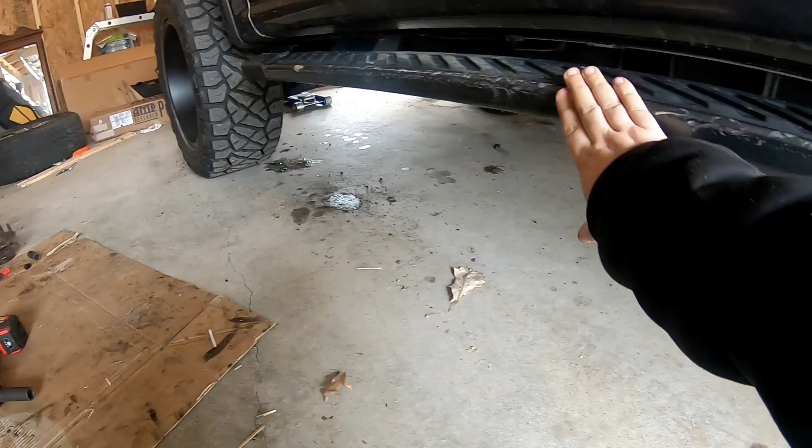Alright, so back in the garage. Here are the stock running boards that are on there. This is the one that got damaged, and I'm going to be replacing it anyway. So...

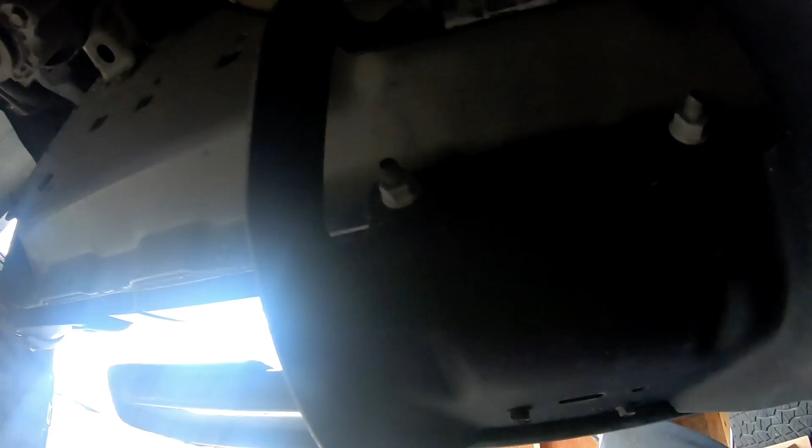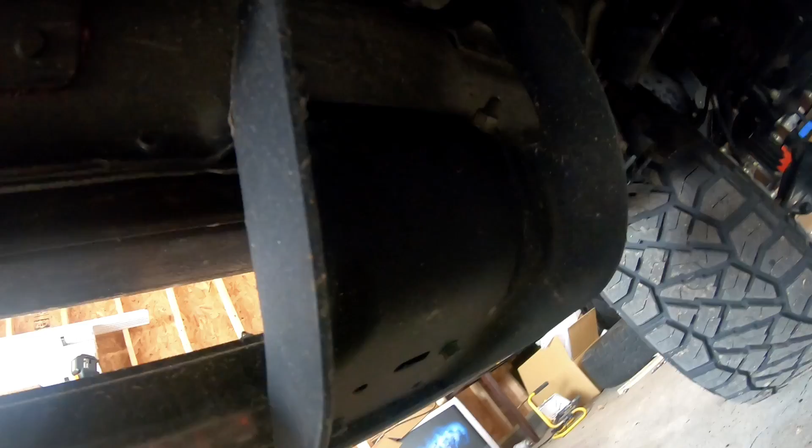Climb under. It looks like it is just 3 bolts in the rear, and then same thing in the front. I assume the same on the other side. So go ahead and take those off.

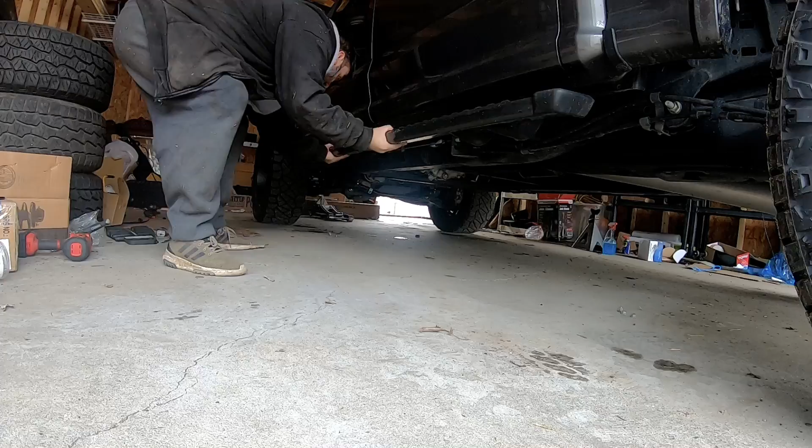Alright, so got all the bolts off. It looks like it should just lift off those posts and come right off, which it is. So simple enough to take off.

Alright, so we got those off. Those are pretty easy, just 6 bolts on each one, 3 at each hinge there, or mount. Take those off. Came off.

Love the way the truck looks without them. However, functionality wise, the family would kill me. So got it off this side. I think it looks awesome. But let's take a look and see what's in the box here for the amp power steps. Let's break into this box and see what we got.

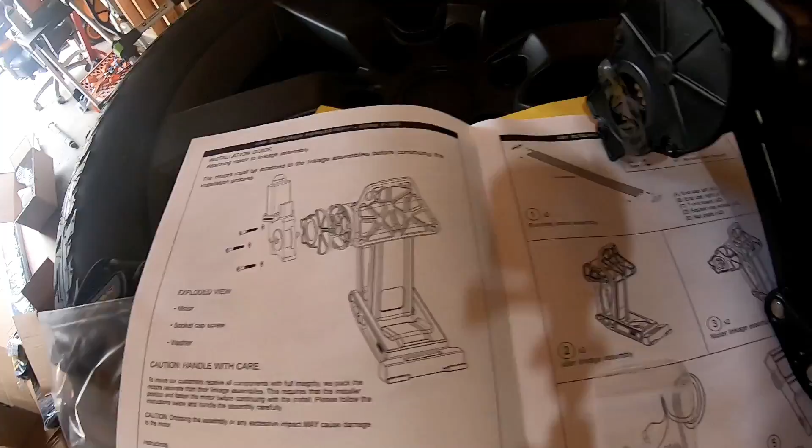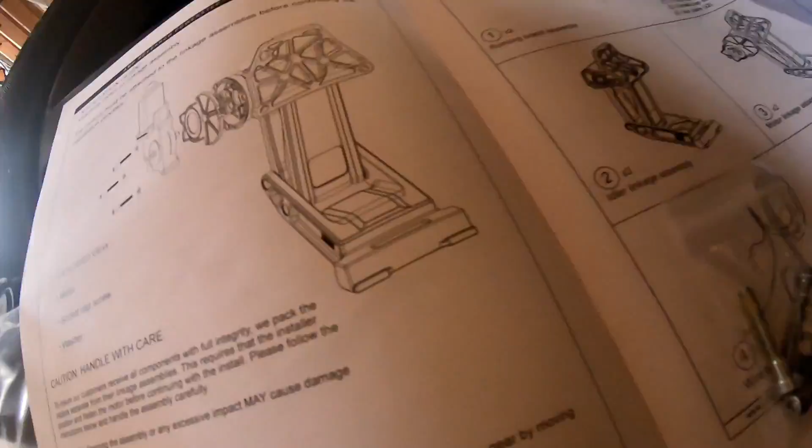Alright, so if we're looking at the instructions, make sure the amp is open. You have this cover over top, the gear, and then the motor is going to fit on like so with those bolts. So let's just go ahead and get that set up. So don't need this tape on there.

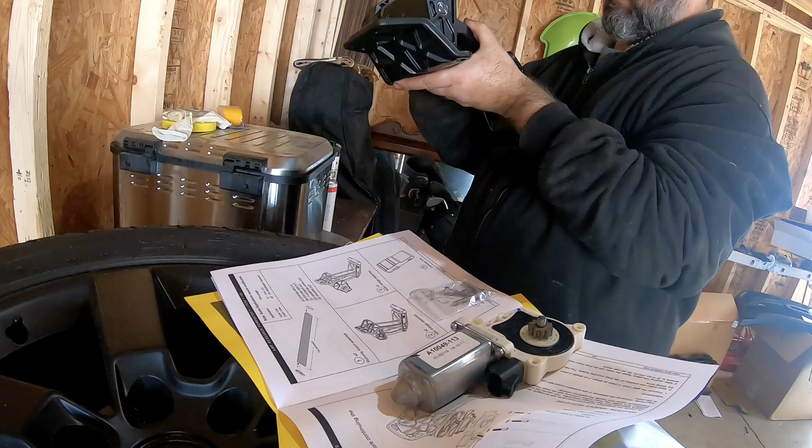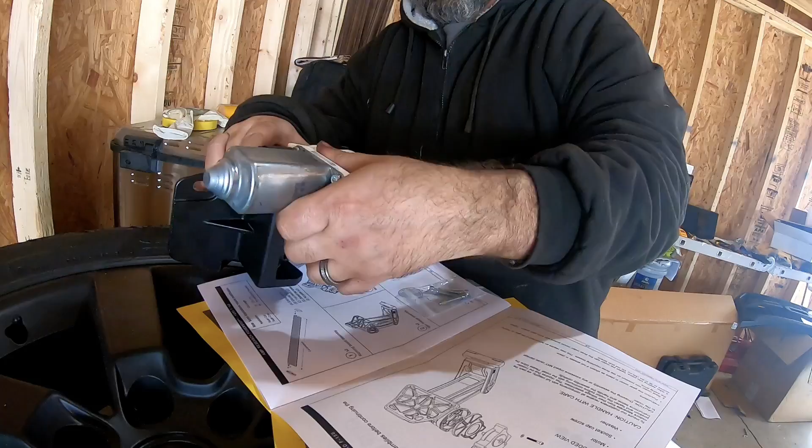So step is open. Get that lined up. There we go.

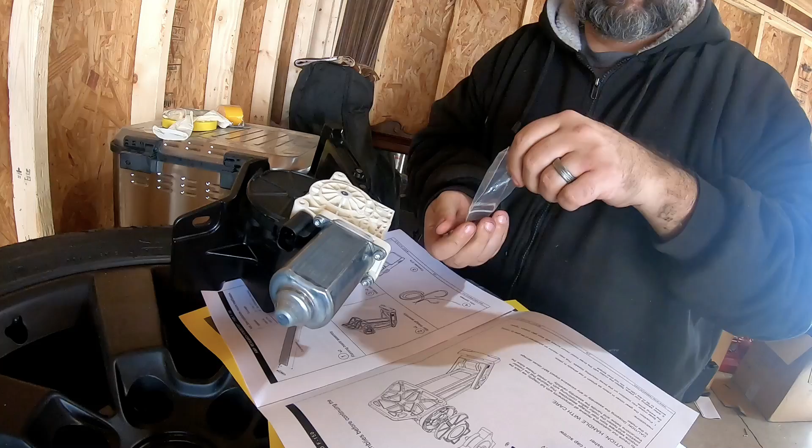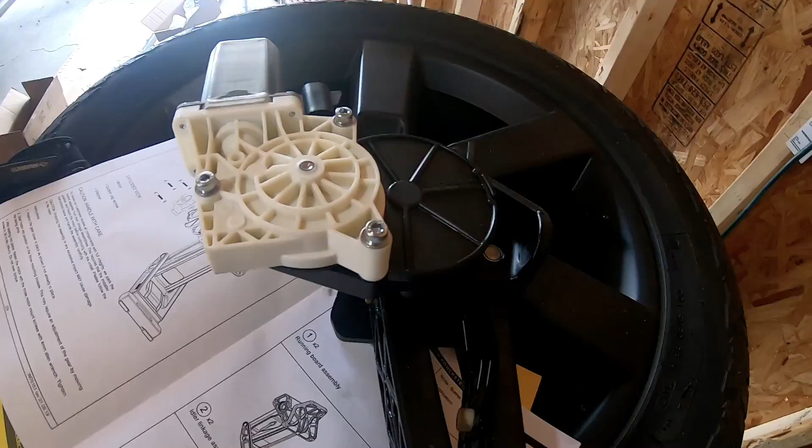All right, so these are going to have to get torqued to 36 inch-pounds. I'll find my torque wrench and an Allen wrench to do that.

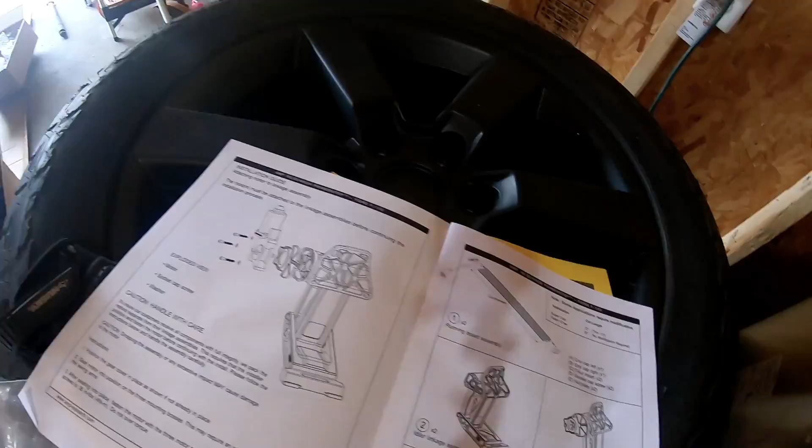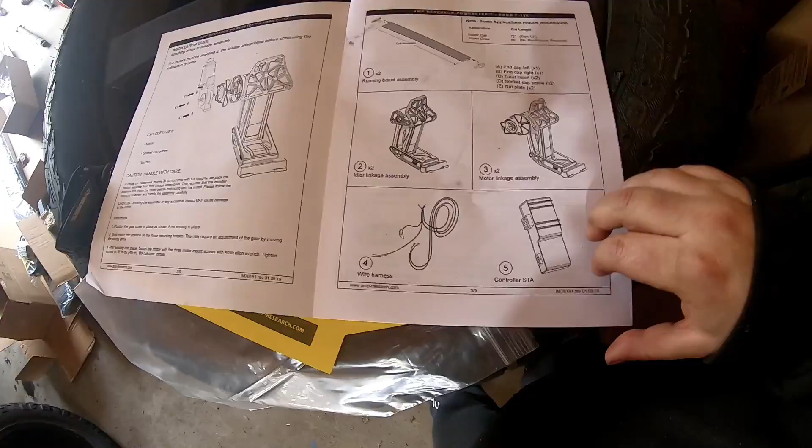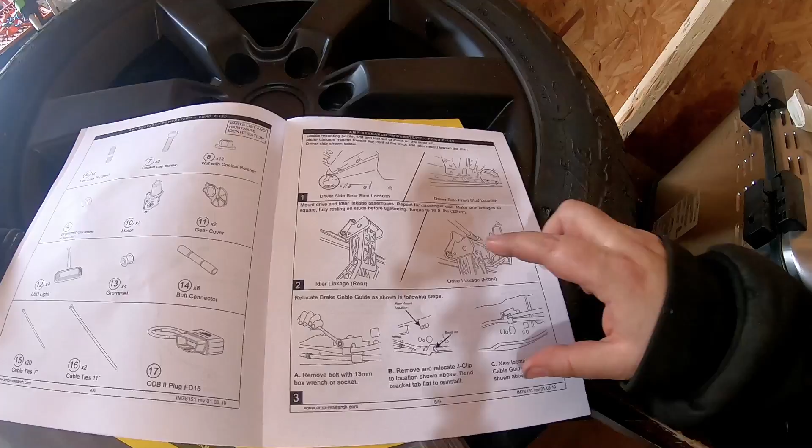Then let's make sure we got everything. Got the 2 boards correct. Got the assembly with the motors, wiring harness, controller, gear, LED lights, OBD2 plug. Going to install the mounts, the one with no motor in the back, one with the motor in the front, and we'll see what we need to do.

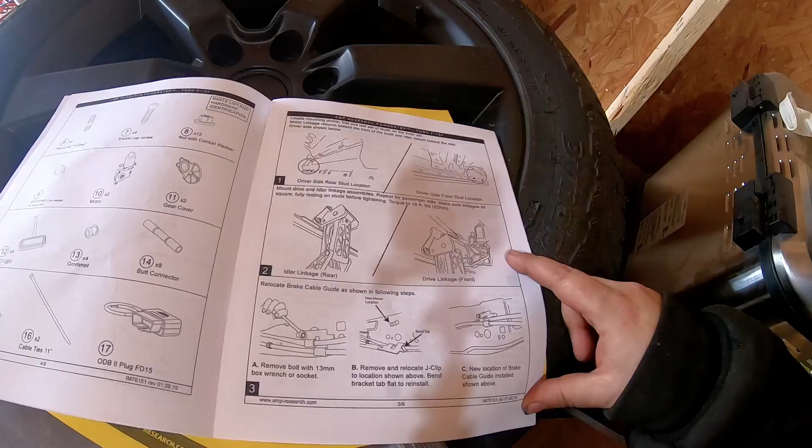Alright, so here's 3 of the old studs. They're already on there. Need to put this on.

This one's a little bit harder to get to. That's going to need an open-end wrench to tighten up, because I'm not going to get a socket on there. These other ones can still get a socket on.

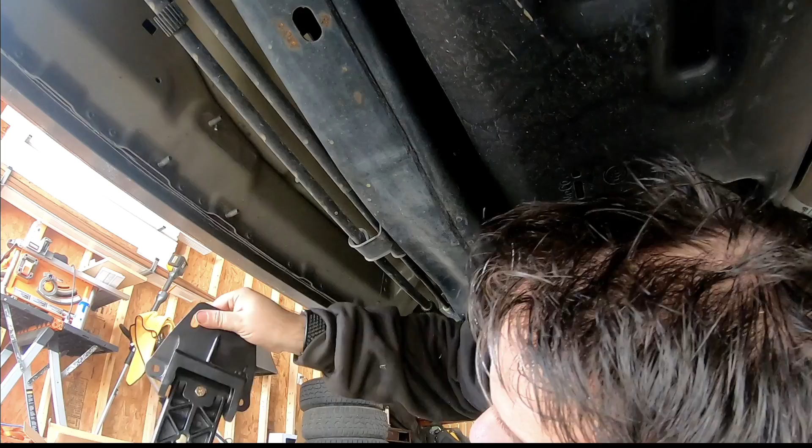Alright, so those are snug. Go do the back ones. Then it's just the same thing in the back, just without the motor. Put it onto the studs.

Alright, got those snugged up. That's where the steps will set. I have to say, this is like the perfect height, this 4-inch lift. I could just roll around underneath the truck without any problems and reach everything, so I'm really enjoying the lift.

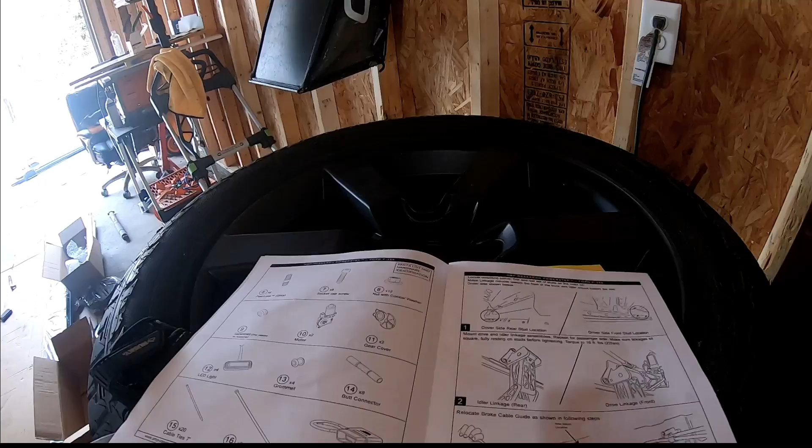But yeah, so these are installed, just snugged up. I'm going to go install the other two on the other side, get those snugged, and then I'll go through and torque everything. I think it said, what was it in the manual? Yeah, 16 foot-pounds, so not too heavy. So cool. I'll get the other ones installed on the other side, get everything snugged up, then go through real quick and torque everything, and we'll go from there.

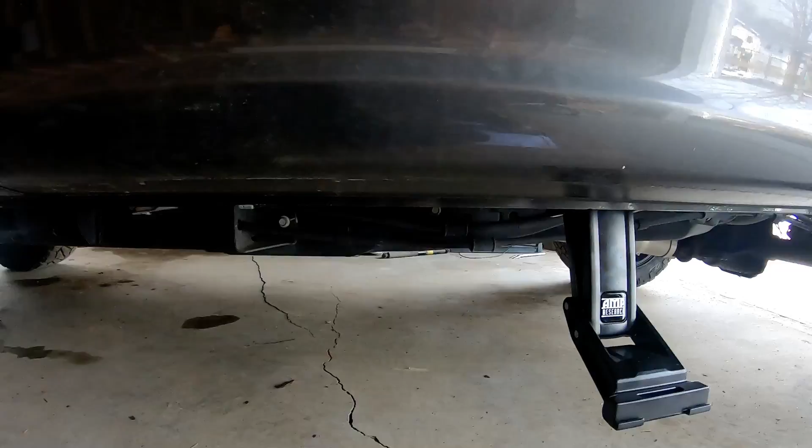Alright, so here on the driver's side, right by the back mount, there is your brake line guide. I need to remove this bracket and move it up here. Take that out. Now there's this tab here, which you're going to have to bend out flat. So you move that up. There's no hole for it to go in, so that's got to get bent flat.

So now I just got to take this clip. Oh shit. Alright, well, supposed to remove that clip and then push it up there.

Now let me go try to find a magnet so I can pull that clip out of there. Alright, didn't find a magnet, but I was able to fish it out. So now I'm going to actually move that up to there.

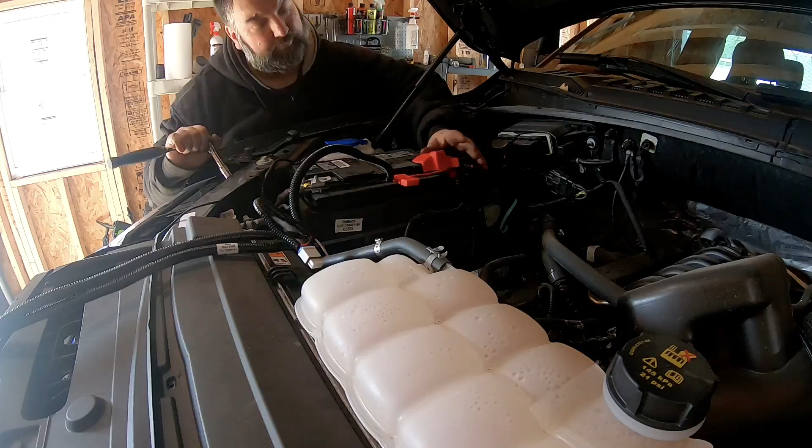Don't have a razor blade on me right this second. Alright, got those connected. This is the short side.

Run along the passenger side and go down. Then the long side is going to come along to the driver's side and go down.

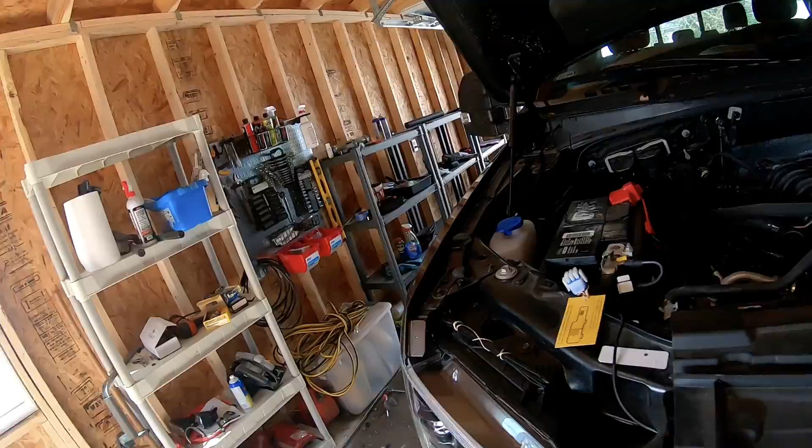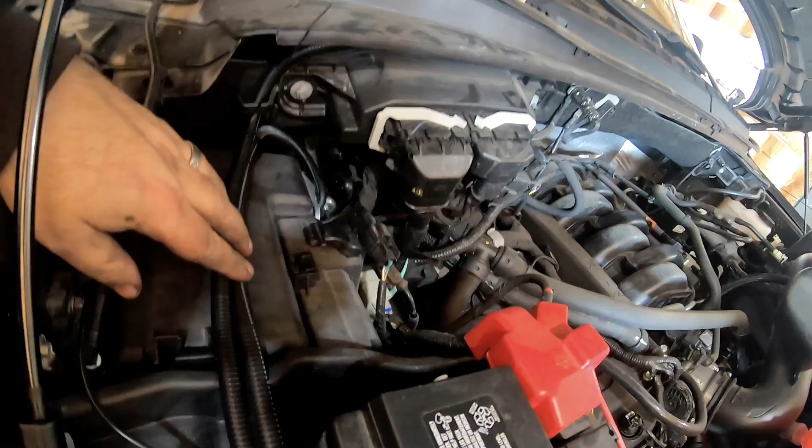That took a while. That's probably the hardest part of this, just finding where to route these cables. On the passenger side it's pretty easy, get down through here. Once you get down, there's really nothing in the way. It comes down.

Just ran it back behind this mount, and then this plugs into the motor, and then there's 2 plugs left to do the LEDs on.

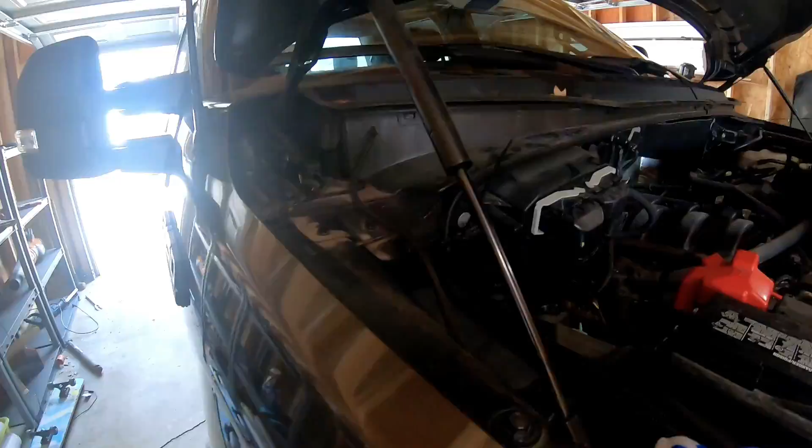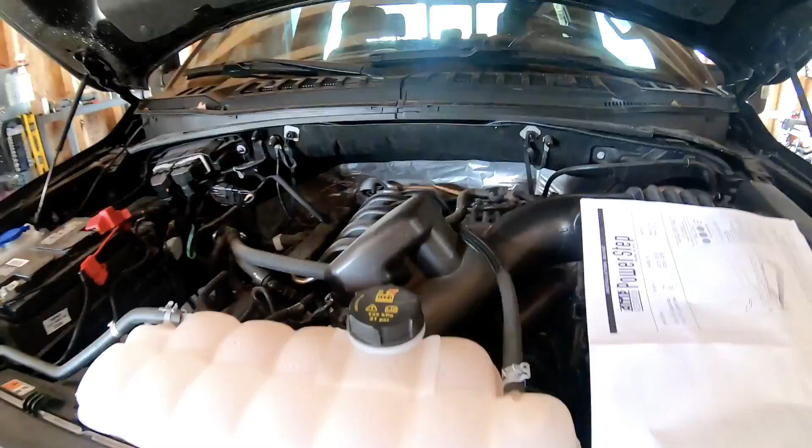Driver's side here, they said to zip tie it up in there, except I didn't find any place really to zip tie it. I have it tucked in there, found a couple of places to zip tie, then run back through here, back down.

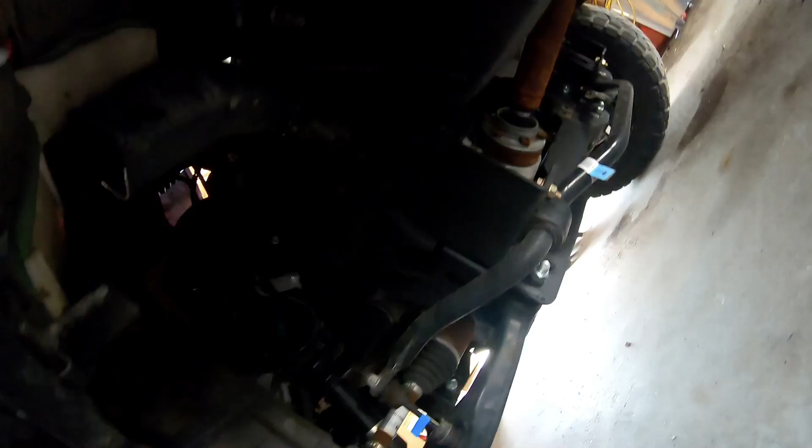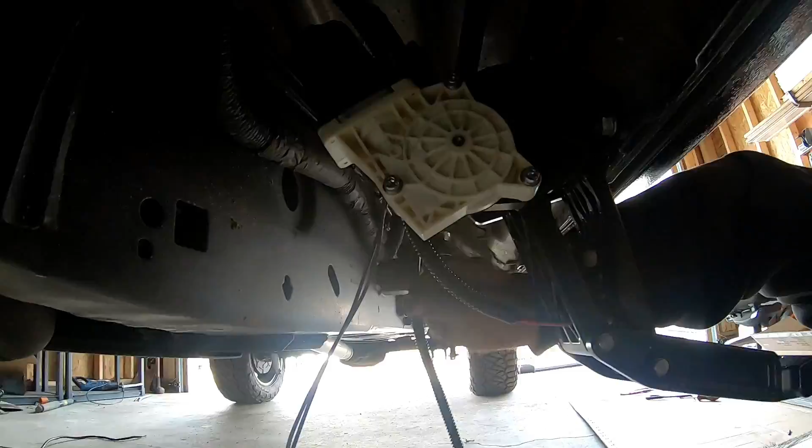Then back and up underneath this mount here. Now the plug is plugged in there, and got the wires for the LEDs, and then for the controller here.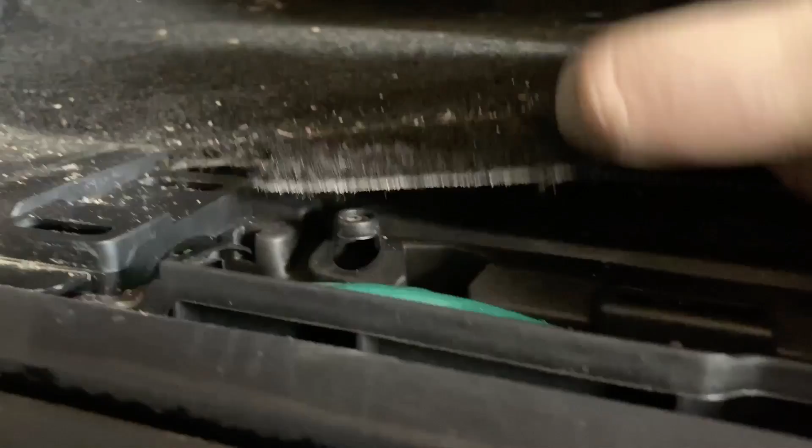Alright, my other camera died, but here under the carpet on the driver's side there's a small rubber grommet. We look underneath, we can see it's just this grommet here.

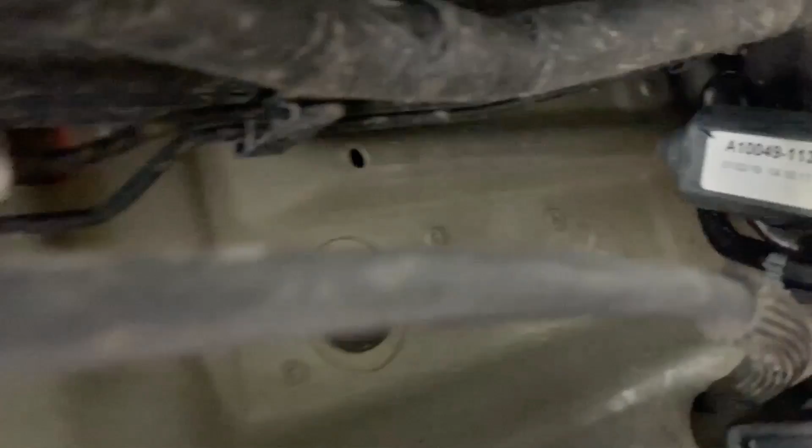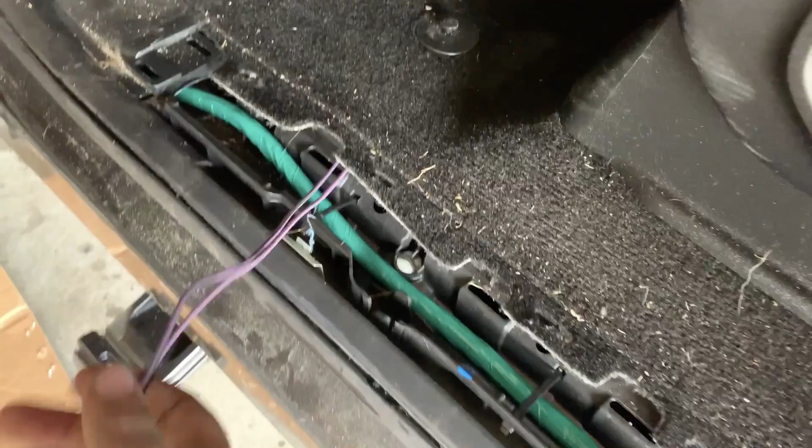So you need to poke a small hole in there to run these wires up through. Push those wires up through - I just used a small screw to make a hole in that grommet so I could push these through.

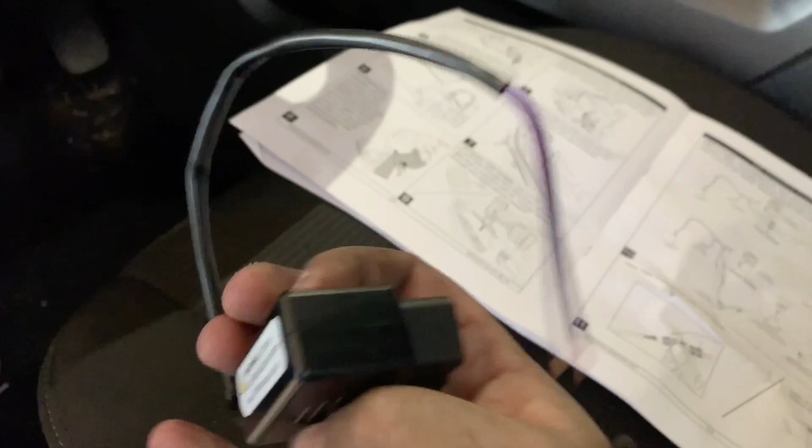Then they get spliced together with this here, and this just gets plugged into your OBD2 port. So splice that together, tuck those wires in.

I marked with this yellow tape where holes should be drilled. I had to go to the store - I didn't have a 19/64 drill bit, so I had to get one of those. But it says mark halfway, half inch on here, and drill a hole in each one of those.

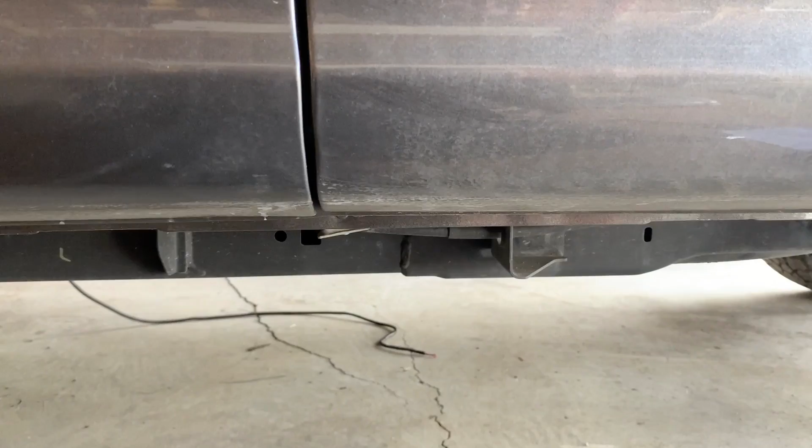Then there's grommets that will fit in there to run the wires for the LEDs. So I'll go ahead and get those drilled out and get that installed.

Alright, here's one of the holes drilled. Got this little rubber grommet here, got that in. That'll go there, and then the shorter of the 2 wires goes in there, so that will connect.

Just for comparison, here's the stock running board, and this is the amp one. It's actually got a pretty wide step to it. I mean, that's half my foot there. That feels like maybe 1/4 of my foot.

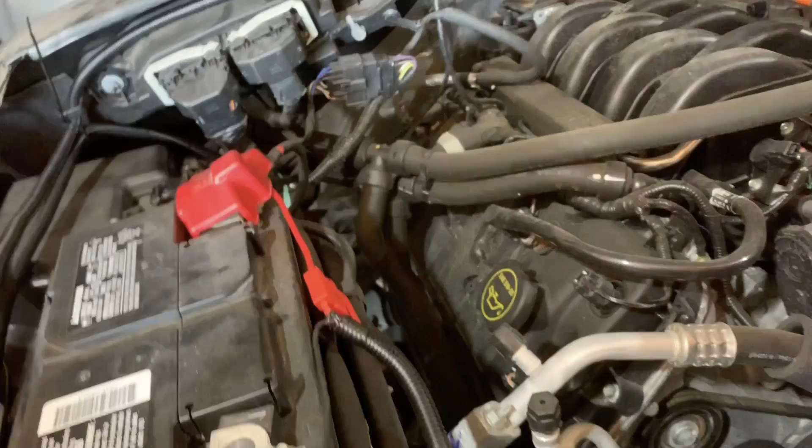And that's probably why you should use 2 people. So up here where we connect it, the red and black terminals, we got these cables coming off, and that is going to connect here to this. So everything's installed.

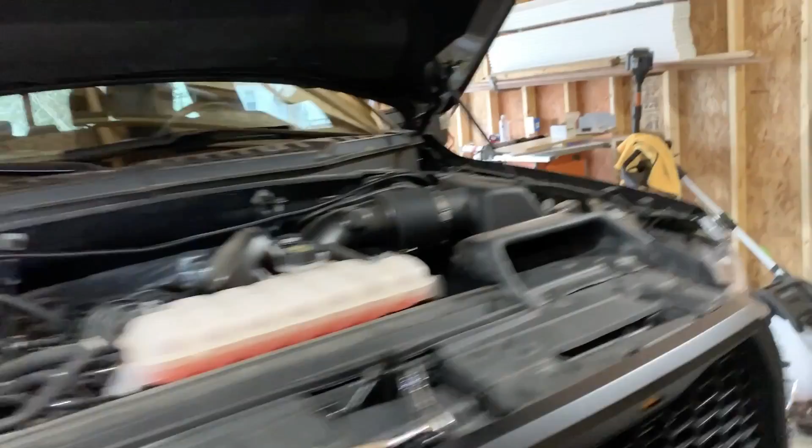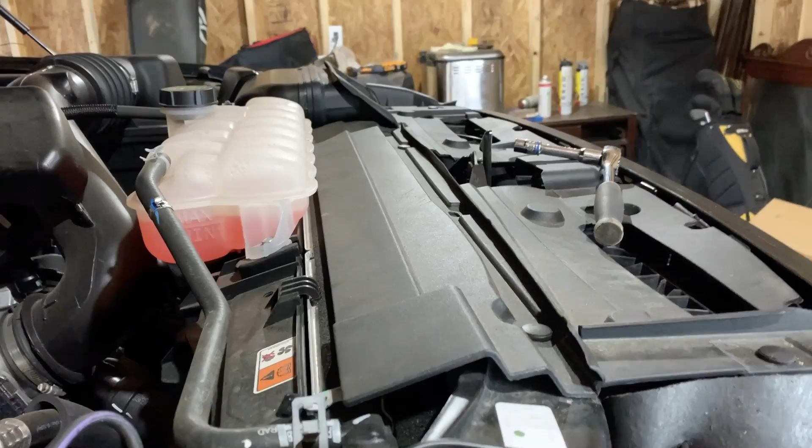Still have to tuck the wires away and get everything zip tied and cleaned up a bit with the wires. I want to actually make sure that it's working, so come over, put the circuit, the fuse in. And put the fuse in.

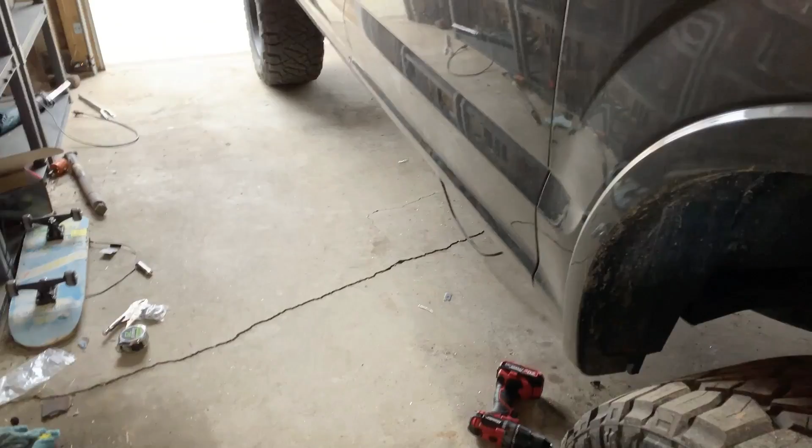As soon as I did, the board's disappeared, which looks awesome. Hopefully they open. Got the lights working.

Those are pretty sturdy feeling. Awesome. Let's try the back door here. It opened.

Let's make sure they're cool. If you keep your foot on it or some pressure on it, they will stay down, which is enough for safety. You don't want to scrunch something in there. But open the door again, close it. That makes me a happy camper.

So I will go through, finish buttoning everything up.

Starting to get kind of cloudy and dark. I don't know if I get a chance to clean it. Maybe I can do a quick wash on the truck. But I did get the steps installed, so I'll get everything cleaned up and see where we're at from there.

Alright, so there we can get a better view of the side with the steps up, which I think looks awesome. And if you didn't know to look for the steps, you wouldn't even notice them, I don't think. But it definitely goes with the rest of the truck with the black accents everywhere.